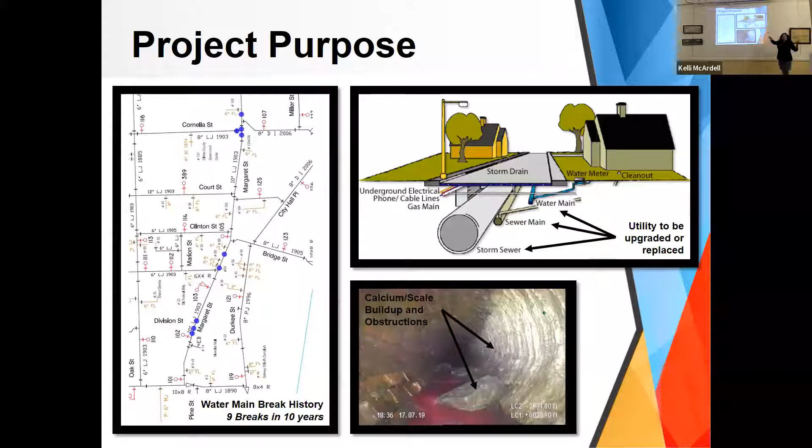Let's move forward with our project milestones and our projects. Right now we are working on those documents behind the scenes, working on all those really small details to produce a set of plans that the contractor can go out and build. Once that's done, which is going to be near the end of December, we then go to advertise and bid the project, which is where you send it out to contractors who are going to bid on the project and hopefully win and receive it.

Construction is expected to take 2 years, and these are the tentative dates - that would be April to November. Obviously, depending on what the winter is looking like and the weather, if it's cooperating, we can stretch that a little longer, maybe into December. Or if it's really cold and we have some snow, we'll shorten that right up to October. So it's expected to be 2 years of construction.

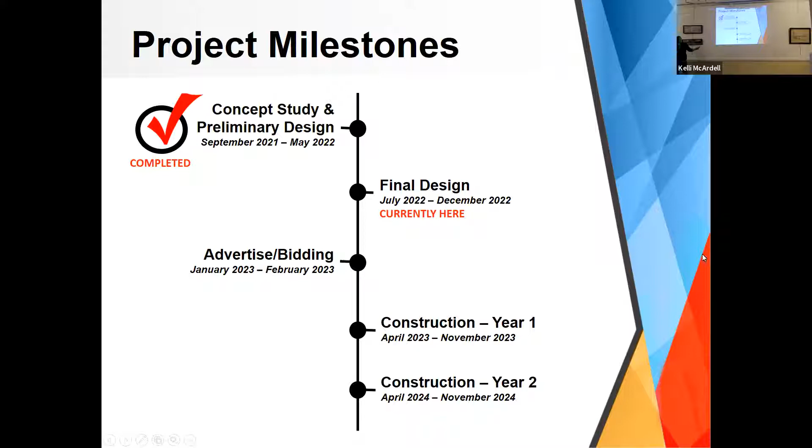So I talked about crosswalks - let's look at, I love providing some photo sims, so let's look at these. A photo sim is a simulation of what the project could look like, and it really helps bring the project to life so you can visualize it in 3D. So this is our most up-to-date crosswalk. Colors may look a little different, but we're going to dissect it. I'm going to show you what the design decisions and city preferences are right now versus our progress that we have made, so you can compare and contrast, because I think that's a really cool thing to look at. So here is our project as it exists right now.

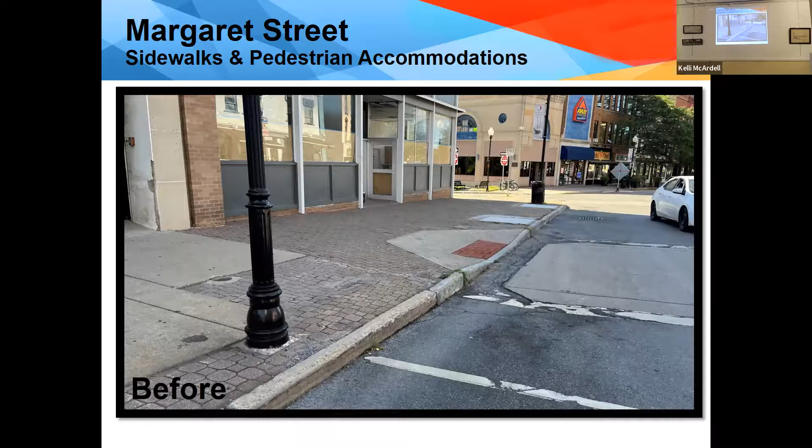This I'm calling our before photo - this is an existing photo of the area. Last meeting I showed you this. You'll see sort of a red Stampcrete snow storage area right at the bottom underneath the light pole and the sign, and you'll also see what's called a type L crosswalk.

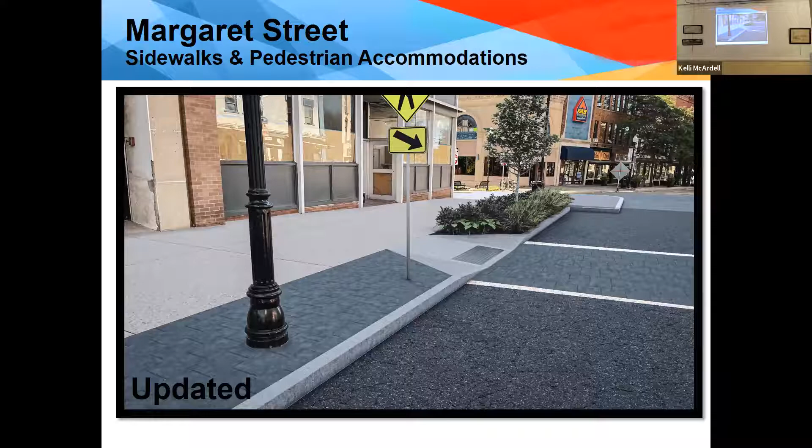So that was last meeting. We have since progressed and changed to a gray Stampcrete color with a concrete crosswalk that is stamped with a brick pattern. So that is going to be our crosswalk configuration with the static signs.

We're also going to provide an update on traffic signals. So traffic signals are just your red, yellow, and green lights. We're going to talk about these 4 intersections right here.

So Margaret Street and Cornelia is going to receive a new replacement traffic signal. And then Margaret and Brinkerhoff, there's an existing signal there that is actually going to be decommissioned and removed and become a 3-way stop controlled intersection. We're going to look at that one a little bit more in depth on the next slide.

So that means the traffic light, the red, yellow, and green light, is going to come down and it's going to have a stop sign. Then at Brinkerhoff and Oak, that will be receiving a new traffic signal with new push buttons, new crosswalks, and new sidewalks. And the last one, Margaret Street, Broad and Pine, will also receive a new traffic signal.

Once the light comes down and a person crosses the street, the traffic will have to slow down. Yes, absolutely, there's going to be stop signs there. We can cross the crosswalk. Absolutely, all of our push buttons are going to be compliant, so you'll be able to reach them for sure.

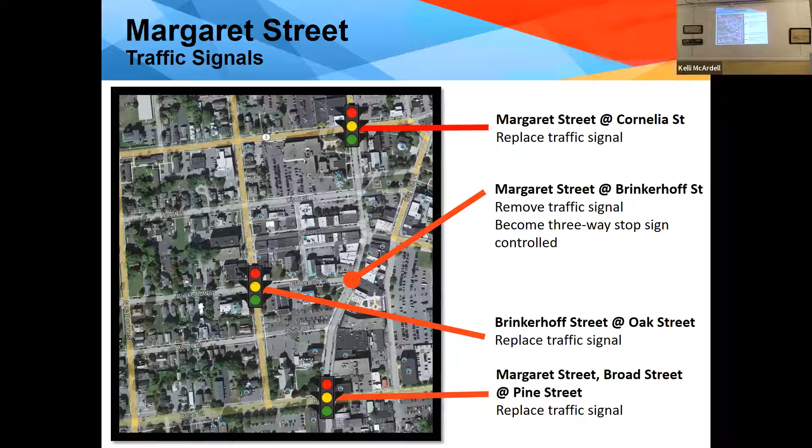So when we talk about traffic signals, and I just showed that figure with those 4 intersections, 3 of them are going to be receiving a full signal replacement. This is generally what most of the signals look like with a span wire, that droopy sort of cable. That's called a span wire.

We're going to be updating them to mast arms. That's just a visual right there of Margaret and Cornelia, and that will happen at those 3. At Margaret and Brinkerhoff, the traffic signal is going to be decommissioned and come down, and it's going to be receiving stops in these 3 locations.

And then you will be able to see the direction of travel that a vehicle could make or execute. I'll just leave that up real quick so you can take that in, because this one's probably a new one for some people, so just check it out.

So one way south to Brinkerhoff from Cornelia, yes. And still 2-way from Brinkerhoff to Broad? Yes. Okay, wait, Brinkerhoff to Broad? Brinkerhoff, yeah, to Broad, bottom section. Yeah, on Margaret Street, there's only one way from... Well, I'm looking there that somebody can do a left-hand turn headed north on Margaret, so it looks like it's a 2-way street to that point.

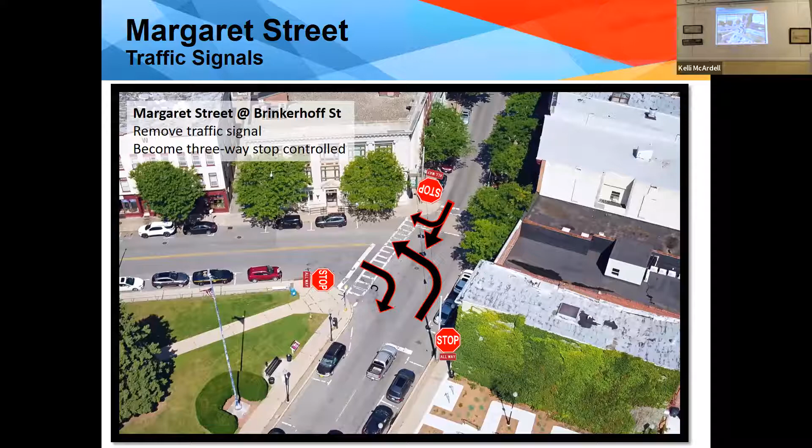Okay, so another photo I wanted to show was the addition of the multi-use path. So this is our existing or before photo, which you've probably seen last meeting. We have our concrete sidewalk with our bike lane, a buffer area, and then a sidewalk in the back. We talked last meeting about making that front area green space for snow storage, incorporating more green space within Court and Brinkerhoff.

There has recently been an adjustment to create a multi-use path that will match what's on US Avenue, a 13-foot asphalt multi-use path. Right here you can see a little picture. It'll have bike lanes in both directions, and then a walking area. I'm just going to keep that up for a little bit so you can check that one out.

Okay, so hopefully you don't replicate US Ave totally, because that's really not a good thing with everybody now getting things shipped to their homes, and with the delivery truck stopping you end up with clogs. I'm just saying, granted, I see there's parking on two sides of the street, I think that's what I'm looking at. Yes, so maybe that'll alleviate that, but that redo that was done to calm traffic calmed it a lot when there's delivery, or especially when emergency vehicles come through.

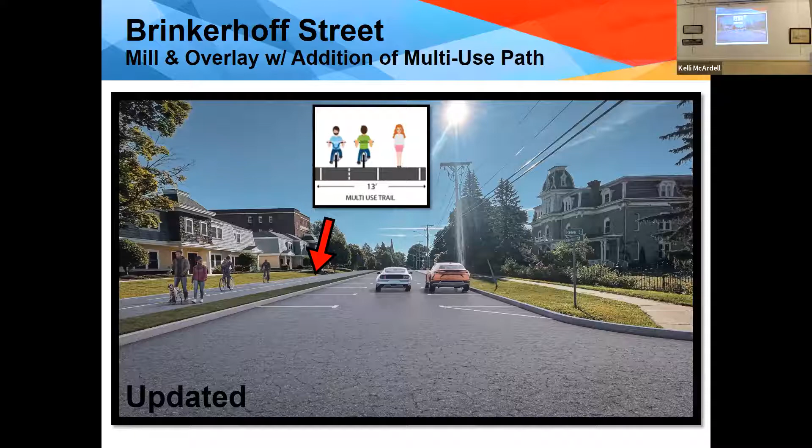So we'll go on from there, and using that photo sim, this is what that typical section would look like. It's almost like a saw cut of the road, and you can see on Brinkerhoff right here with that new multi-use path right on the side.

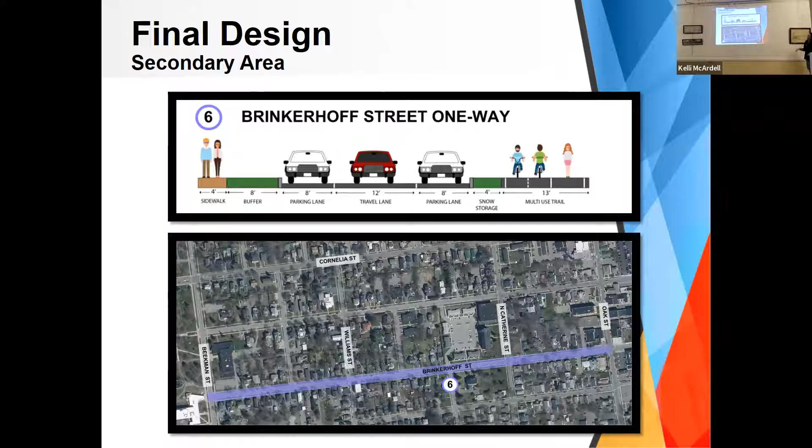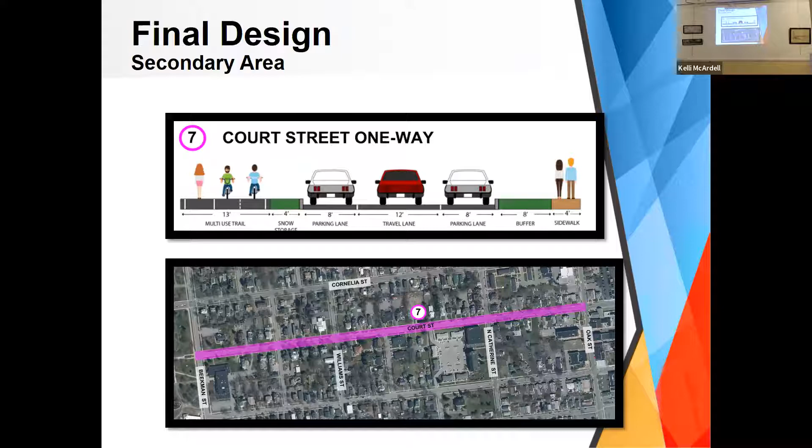Same number of heads? No, no additional. So we're going to do our photometric view, which shows the different light control in the area. It's almost like a CAD graphic and will determine if there are any spaces that are too dark and need to receive some lighting. More than likely, I'm not going to say 2 to 1, but it's going to be close to that - for every one of those Cobra heads, you're going to need close to 2 of the decorative lights.